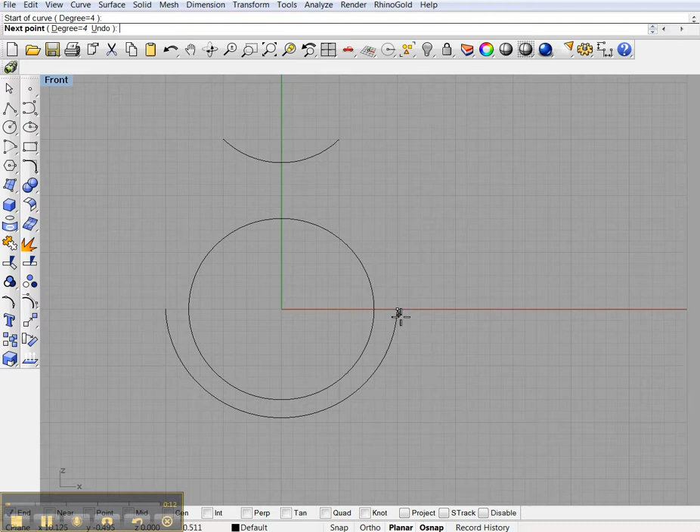Here's something I finally figured out. I don't know if anybody ever had this situation. Let's just say we're making a ring here. We got this far with it, and we're going to connect this right here. We'll go from the end there, and we just kind of want to make it like that. And then let's just mirror it to the other side for the sake of discussion right now.

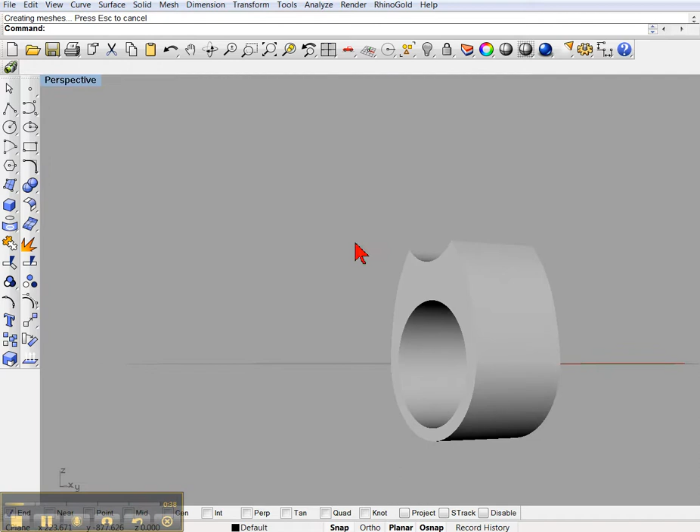Alright. Now, it looks pretty good. Let's extrude it and see what we get here. Doesn't matter at this point. Now, even though we put this together, when you go to mill it, you're actually going to see a little crease right there. And let's see why that is and how we can get around that.

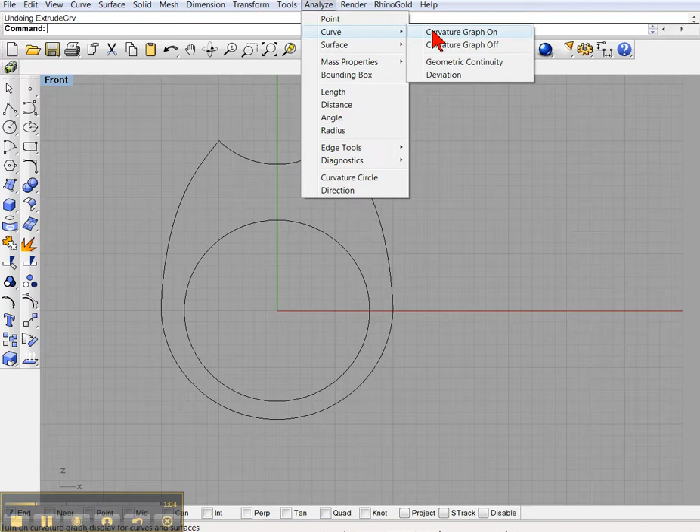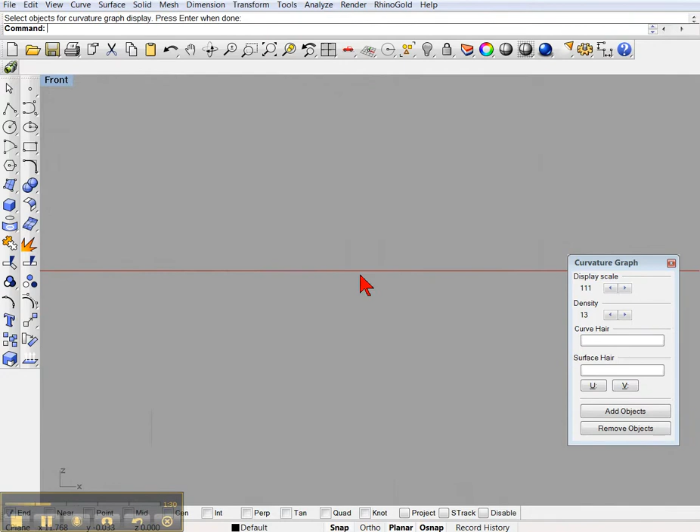Let's undo that. Now, if we look at this curve right here, put the analyze on, go with the curvature graph on. Well, first of all, I'm sorry. Let's join all these right here, and let's join. Sorry about that. There we go. Now let's turn our curvature graph on. Take a look at what we got. Now, as you notice, this area right here, this gap right there, that's the reason we're having that issue with the smoothness of our surface.

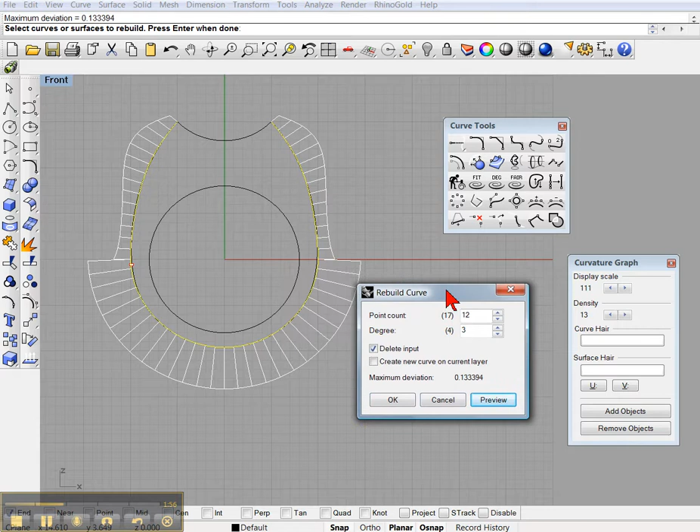Here's one way that we might be able to correct that. If we go into the curve tools, let's rebuild this curve right here and bring it down. Let's start with a couple, hit the preview. And for sake of this demonstration, let's just say OK. You see it's much smoother now. Let's go with the fair curve, hit that, and I use a tolerance of 0.5, and as you can see right there, much smoother. Now let's extrude that out and see what that looks like.

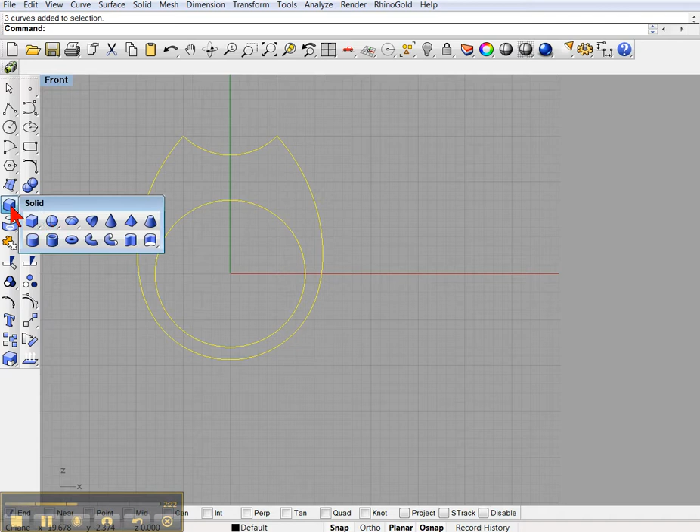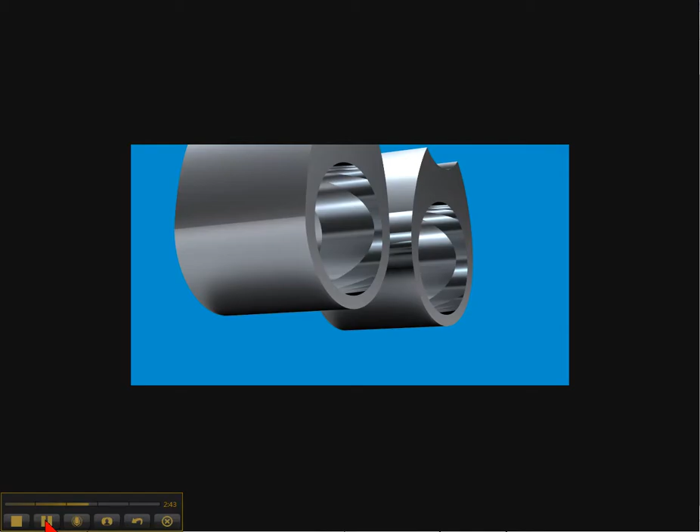Now, as you see that, perfectly smooth ring now. I'm going to do one more example and show you one more time on that. And as you can see, you see the seam right there on the render as opposed to this view right here. No seam. I'm going to show you another model real quick.

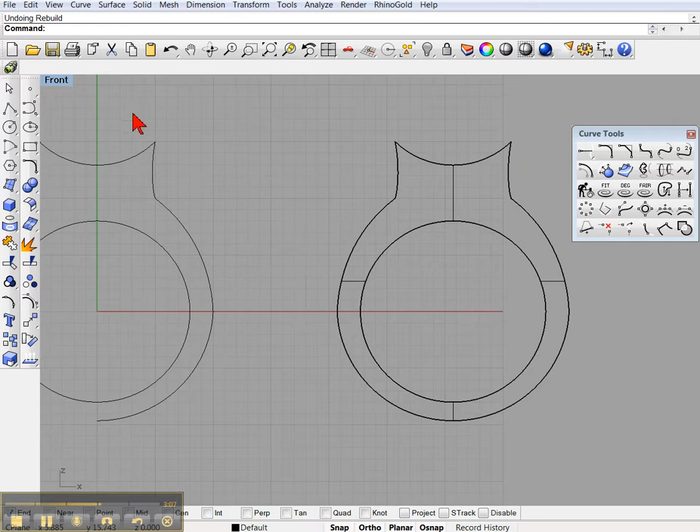Okay, now I drew these curves right here, and it looks pretty good right here. It looks like it might be pretty nice, but let's see. Once I extruded it out, you can see the seam right there, and it's a little choppy there. It could be maybe smoother. So let's take a look at how to fix that problem. Once again, go back onto our curvature graph, select this, and you can see our gap right there. That's no good for a smooth surface, and that's pretty jaggedy too.

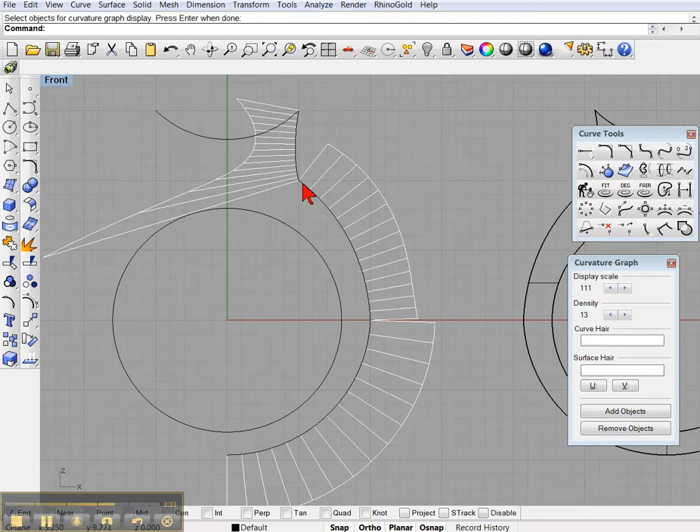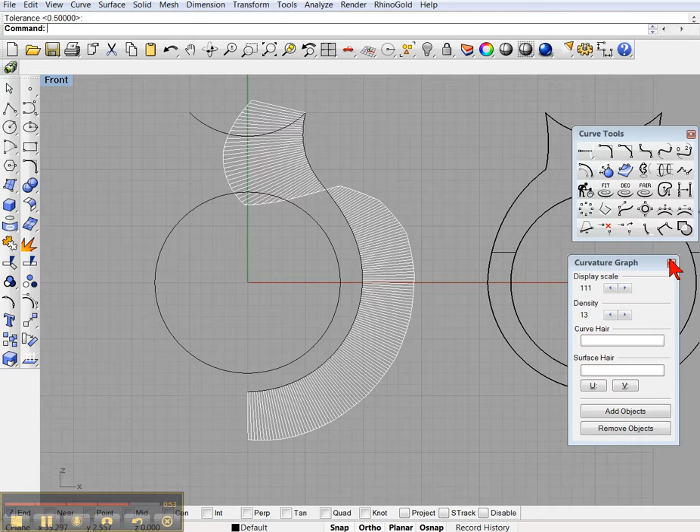So let's rebuild this curve, and let's take it down maybe 12, get a preview. You can see how it changed there. Maybe go up to a 13. Alright, we might have to live with a little bit. Let's see what that was. 15. You could maybe do it there too. Let's just say okay. Now, fair your curve, and there, with a tolerance of 0.5, turn that off. Let's mirror that.

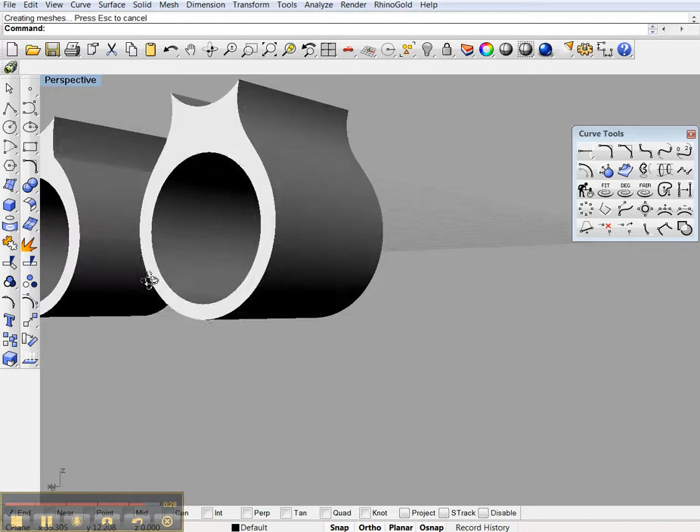Now, let's do our extrude. Whoops. Let's do our extrude. Now, as you can see, no seam. There's our original. It's our seam. It's a much smoother model. So that's something to think about when designing. Give you a little insight there.